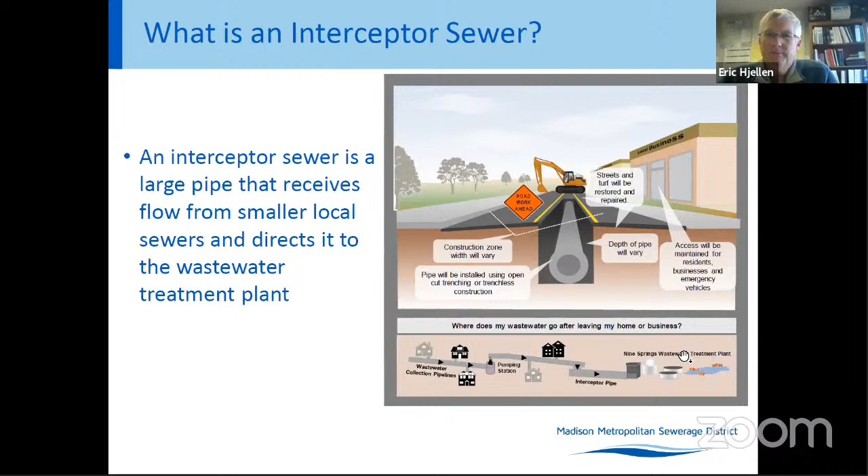The latest addition was the West Interceptor campus relief from 1999 to 2004. And that was done in 4 phases. On the east end, I believe it ended in Regent Street, somewhat north of Camp Randall. And then on the west end of that project, we ended at Walnut Street, which is just a little bit east of Highland Avenue. Next slide, please.

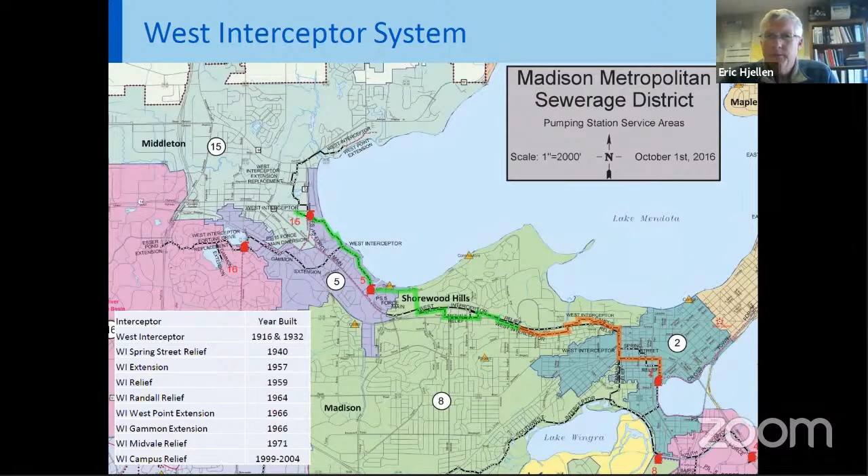We hired Strand Associates to design the entire Shorewood relief, which is phase 1, phase 2, and phase 3, and which is kind of shown in the red. From the end of the red to the end of the green, that's pretty much where phases 1, 2, and 3 are. And I'm going to turn it over to Tom Stetzer. He's with Strand Associates. He was the project manager at Strand for this project, and he'll talk a little bit about alternatives analysis and when the 3 phases will take place.

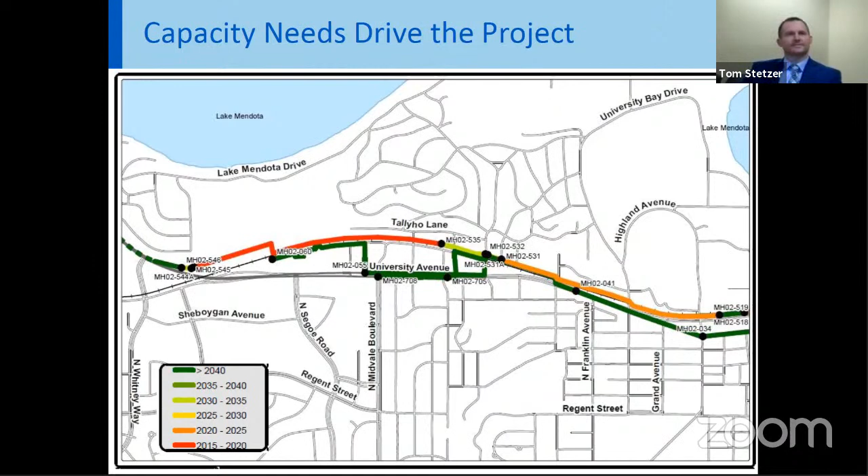Yeah, thanks, Eric. Next slide, please. So our project design started back in 2019, and really the first step in that process was for us to do some data collection, but then to start our alternatives analysis portion of the project.

And so we looked at the entire corridor, and we started looking at some different alternatives for where this new relief pipe could go. So tonight we're mainly going to be focused on the area within the red box on the screen, which is the phase 1 limits, like Eric had mentioned. And so in this area, back in 2019, we had looked at primarily 3 different options for routing the new relief sewer. We looked at one option that went through the middle of the golf course.

The second option was the middle option, in a medium red color, I guess you could say, which is just north of the railroad tracks. And then we looked at a third option on the south side of the railroad tracks. As Eric mentioned, the existing relief interceptor sewer goes on the north side of the tracks. And so we looked at a variety of things.

We had one public information or involvement meeting to receive input from stakeholders from the communities. We talked to the City of Madison multiple times. We met with the Village of Shorewood Hills to get some valuable input. We talked to the managers of the Blackhawk Country Club as well. We looked at things like constructability, tree impacts, potential impacts to roadways, potential impacts to bike trails in the area, utility impacts and things like that.

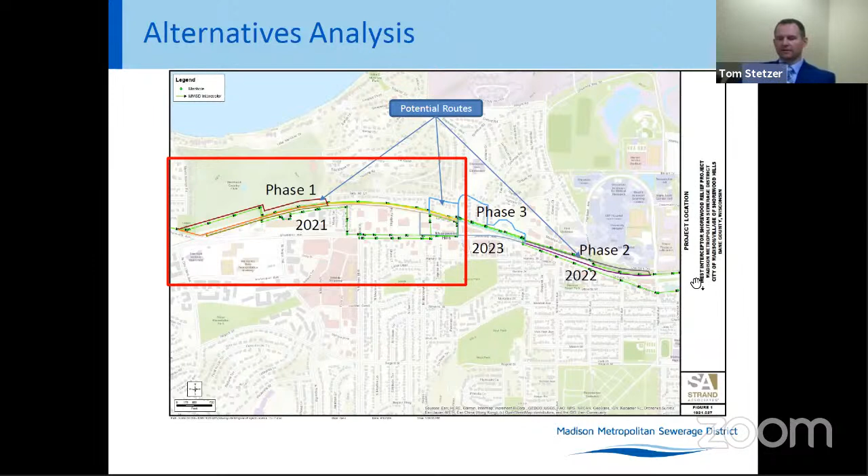The next slide kind of zooms in a little bit just on the phase 1 route, which we're mainly here to talk about tonight. All right, so the phase 1 route, you can see in kind of the red line on the screen there, starting at kind of the western edge of Indian Hills Park, and then the pipe travels all the way over to just west of Shorewood Boulevard.

So again, as I mentioned, the new route will replace the existing pipe with a larger pipe in generally the same location, just north of the railroad tracks. I also want to mention that throughout our design phase, we did have a certified arborist, Brianna Frank from Tree Health Management, on our design team.

She went in and tagged and evaluated every tree along the corridor to help us understand the best alignment for our pipe, but then looking forward, also to put together a tree protection plan, the next bullet point on the upper right there, that the contractor will have to follow during construction.

And some of those activities have already started here recently, as the arborist has been out there to do some minor tree pruning. And then there'll be some additional tree protection items that'll take place in the future, including some air excavation and pre-cutting of roots. And then there will be some removal of some select trees out there along the corridor.

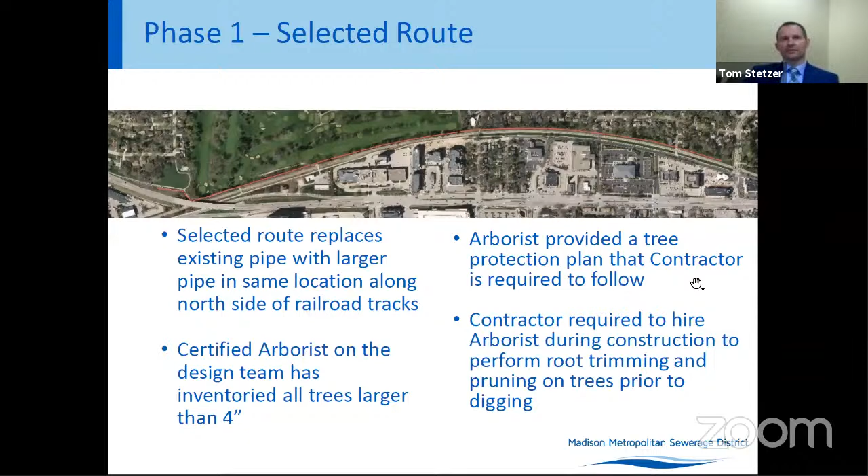I just want to mention that within the bid package, it was a requirement that the contractor had to hire a certified arborist. It turns out that they are going to use Tree Health Management, which was also the arborist involved during the design phase. So there's some nice consistency there, again, to proactively implement that tree protection plan that Brianna drafted throughout the project. Next slide, please.

We have had some sewers in the district in the upwards of 40 to 45 feet, which is on the very deep end. But in this area, being in the 10 to 15 foot range, what's nice about that is the contractor doesn't have to excavate quite as wide of a trench to get down that deep to install the pipe. Next slide, please.

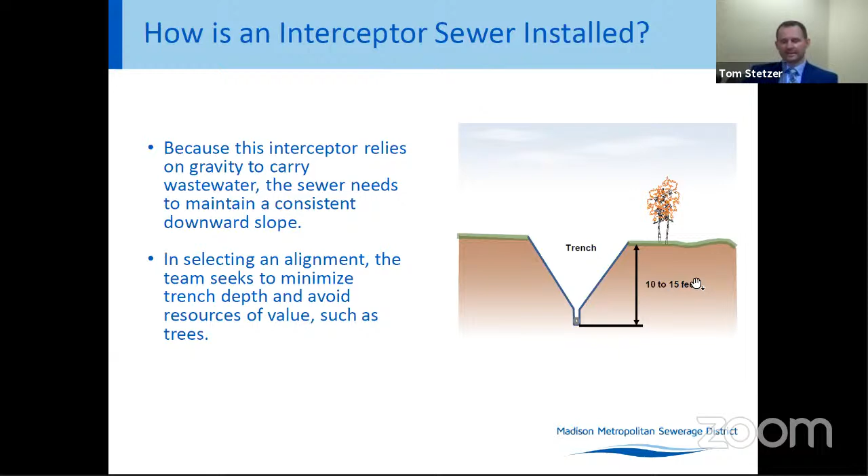So with any construction project, there's going to be some impacts, right? So just wanted to highlight a few of those things now as we're getting close to construction, and we're going to talk about schedule here in a minute. But what are going to be some potential impacts and disruptions during construction?

Typically the contractors will install pipe from downstream to upstream. So in this case, that means they're going to be starting down by Shorewood Boulevard and slowly working their way west. So the first full closure that'll happen due to the excavation activities will be Western Road. So that one will be closed. Meanwhile, Highbury will be open at that time.

So one of the first things that the contractor has to do is set up bypass pumping operations. And so this pipe that we're replacing has active wastewater running through it. And so they have to set up pumps basically to pump through their own above ground piping kind of around the project, so that they can work on the pipes without active wastewater running through them.

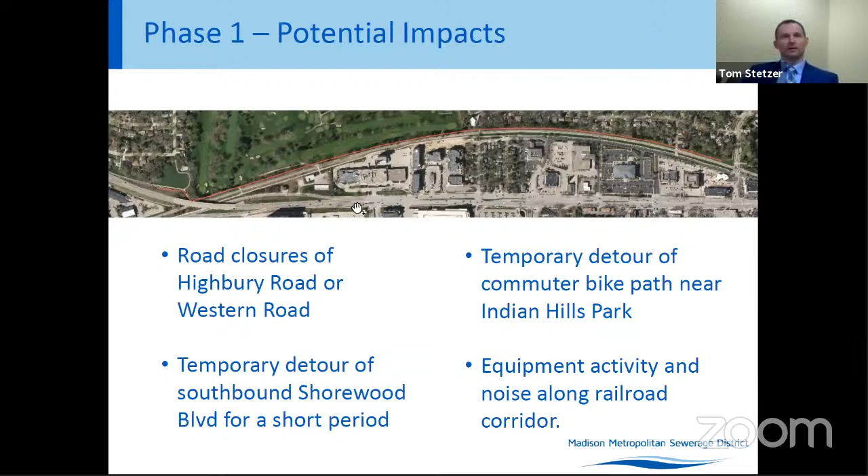A couple other items that we wanted to mention. After the MMSD sewer was put in, as Eric mentioned, decades ago, there were plenty of other utilities that went in throughout the corridor. Railroad corridors in general are popular places for things like fiber optic cabling to get routed.

And so when evaluating this project corridor, we came to the realization that there was a fiber optic cable owned by UW Health that was going to be in direct conflict for a long stretch of our pipe in this corridor. You've likely noticed some activity out there already, but the UW Health fiber contractor is relocating their fiber optic line throughout the corridor on the south side of the tracks, and I believe a little bit along University Avenue, basically to get out of the way so that this project can then happen.

And then other potential impacts, again, I mentioned the arborist has been out as of this week doing some more inspections on trees. There's been some tree pruning that has started. Our technicians from Strand were out today to put some wood lath with ribbon out there to mark where the new pipe is going. So anyone who stops by should see those. They're spaced about every 100 feet.

And those lath are going to further help the contractor and the arborist understand final decisions on some of these prunings, some of the transplanting that will be taking place by the village, and then some trees that will have to be removed in the railroad corridor that's on the DOT property.

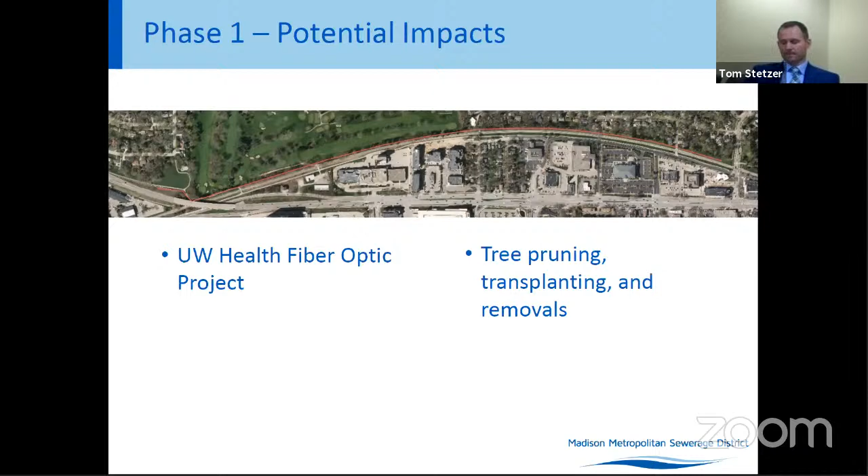Next slide, please. So I'm sure everyone's anxious to hear about when this is going to happen and when the major disturbance is going to happen. We did have our pre-construction meeting a couple weeks ago. The contractor is Advanced Construction. Their schedule has been a little bit fluid. It's nearing the end of heavy bidding season for contractors, so they're trying to figure out when they're going to get all their work done throughout the year.

Originally, the contractor's initial construction schedule was to start in early April. As of today, Eric talked to the contractor, and it looks like we're probably looking at early May for the heavier construction activity to start. So the schedule might push about a month as far as the start date is concerned. We anticipate construction to start in early May and continue toward the end of the year. Contractually, the contractor does have till the end of the year to finish the project and get all the sewer connections made.

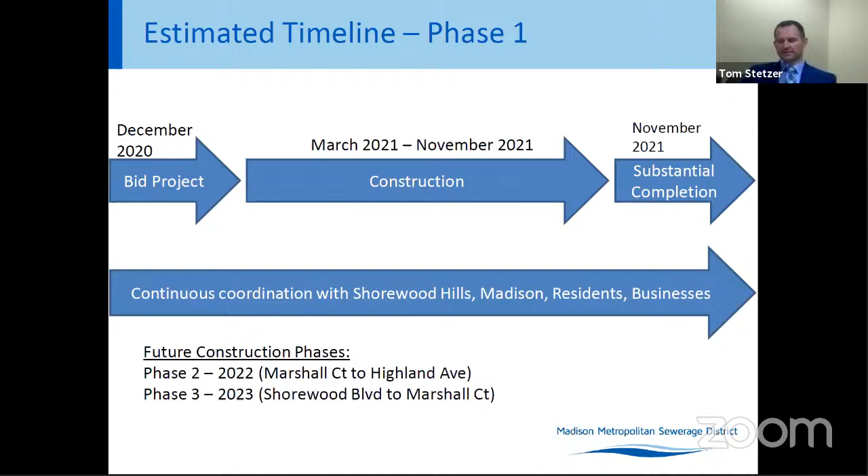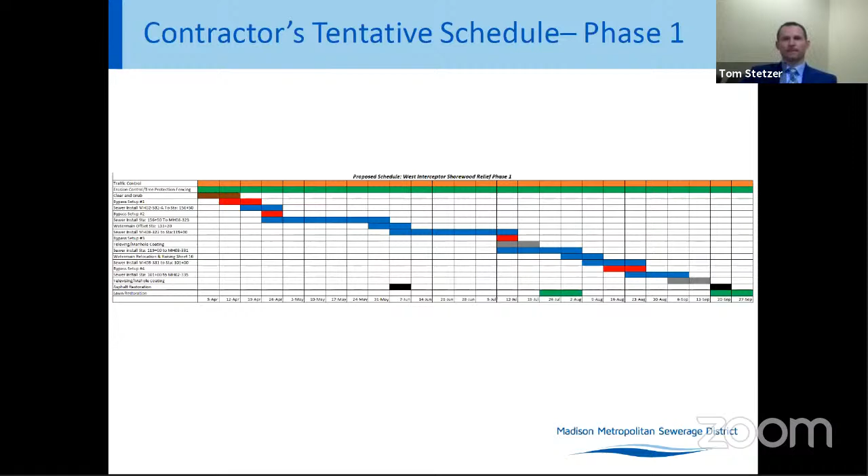And again, contractually, they have until the end of the year, end of December, to get everything substantially complete. Depending on weather and things like that, there'll probably be a little bit of restoration type of work in the spring of next year that'll have to get buttoned up by the contractor to make sure everything's looking really nice before they wrap everything up. Next slide, please.

So yeah, I know Eric wanted to mention that there's an option for email updates, I believe, on the district's website. I went on there today as well to check it out, and there's an option for you to provide your email address and your name to receive email updates along the way for schedule updates, things to expect, and things like that. So maybe Eric, I'll turn it over to you to facilitate any Q&A. Sure, sounds good. Thanks, Tom.

Yeah, I believe the email alerts, you can sign up. There's a project page on our website, and if you go to that project page, then you should be able to sign up for those email alerts. Basically, it'll be schedule updates and things like that. So next slide, please. Yeah, I guess we're at the end. So if you have any questions, of course, ask now. Give me a call, my phone number is there. Send me an email. And if there's any questions right now, we'd be happy to take them.

Eric, I have a quick one. Okay. That all looks great. Thank you very much for all of your due diligence to your team and consultants. A question I had is, and maybe this is for Tom, how long do you think the bike detour at the west end will be?